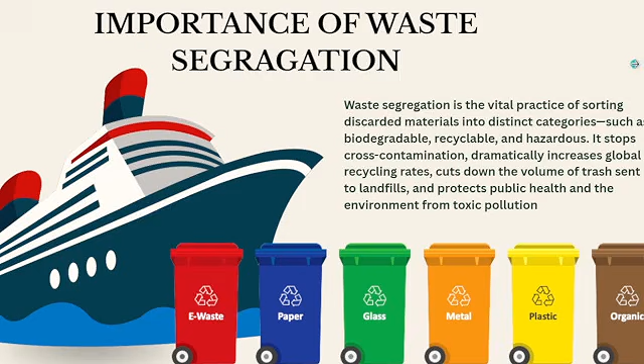Alright, for the topic of understanding shipboard garbage, let's identify the different types of garbage that we may encounter on board. In this slide, there are several common categories: e-waste, paper, glass, metal, plastic, and organic waste.

Let's briefly discuss each one. First is e-waste, or electronic waste. These are discarded electrical or electronic devices. Examples are smartphones, laptops, broken televisions, refrigerators, and microwaves. On board, we may also encounter electronic components like damaged sensors, circuit boards, wirings, or other electronic equipment.

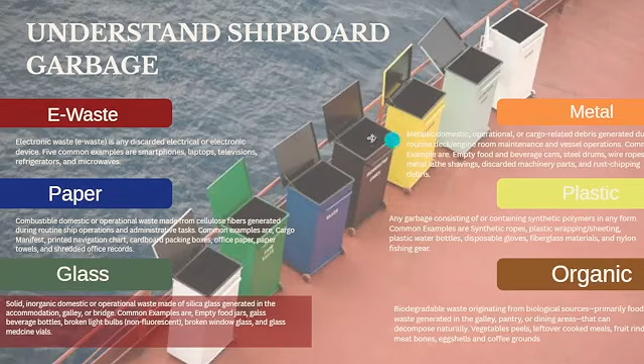Next is MARPOL Annex 5, the most important part for today's lesson. This deals specifically with how to prevent pollution by garbage from ships. Our main objective is to protect the marine environment by regulating how ships manage and dispose of garbage. That is our main objective for MARPOL Annex 5.

For all seafarers, MARPOL Annex 5 is not simply a regulation we study for an examination—it affects our daily work on board. Every time we separate garbage, store the waste, process the waste, record the garbage operations, or arrange disposal through a port reception facility, we are already participating in shipboard garbage management under MARPOL Annex 5.

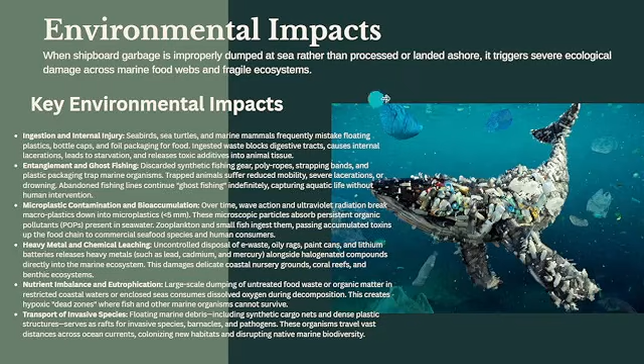So it all boils down to proper waste segregation or garbage segregation. Here, the shipboard waste management.

Now we move from the environmental impact to the practical side. What do you think, or how do we manage waste on board? Shipboard waste management involves several important systems and procedures.

First is garbage separation. Can you see here? There's a lot of trash bins. Food, plastic, metal, and other waste must be segregated or separated according to the applicable garbage management procedures.

Secondly, the incineration system. Some approved waste types may be burned using the ship incinerator. But we must remember that not everything can be put into the incinerator. There are materials that cannot be burned because they can create serious hazards if improperly incinerated.

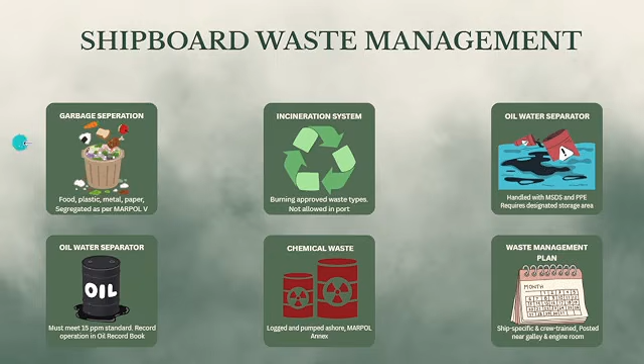Now, since we have covered the basic foundation, we have discussed what waste segregation is, the major types of shipboard garbage, MARPOL Annex 5, the special areas, the environmental consequences of improper disposal, and the basic systems.

Used for shipboard waste management. From the next part of our presentation, we will go deeper into specific types of garbage that are produced by different departments on board, including the galley, the engine room, the deck, and the cargo operations.

Now, as we continue, I want you all to think about your own experience on board. Ask yourself, what kind of garbage does your department, for example if you're from the galley, produce every day? From your cabins, from the engine room, and more importantly, am I putting each type of garbage in the correct place?

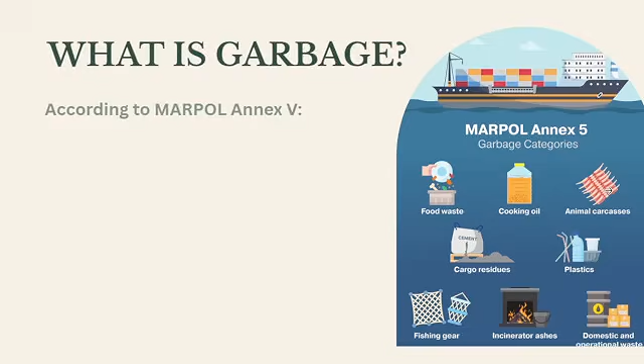So basically, when we say garbage according to MARPOL Annex 5, it includes all this - generated during normal operation of a ship. I want to emphasize, normal operation of a ship garbage. Every day we cook, we maintain equipment, crew members live and work on board. So garbage is not something we do only when we arrive at port. It is an everyday shipboard responsibility.

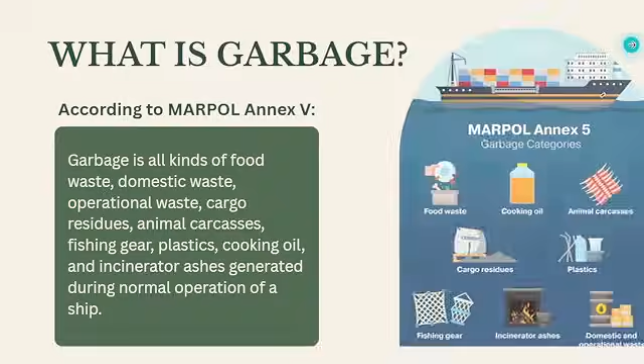And for Annex 5, as discussed earlier, these are the special areas. So after discussing the special areas, let's go to garbage categories - we have plastics, food waste, domestic waste, and operational waste.

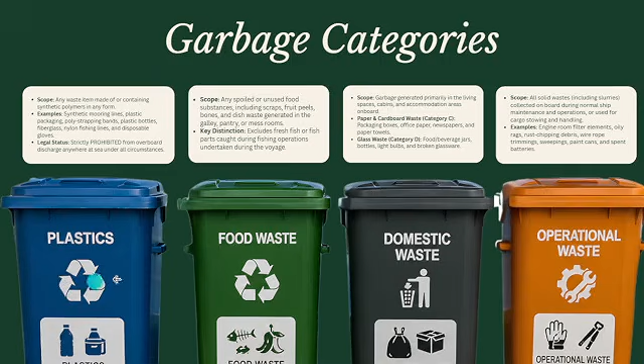I want you all to remember, it's so basic - proper garbage classification is not only simply about putting waste into different colored bins. We need to understand what garbage actually is, where it came from, and what requirements apply to it. So if it's plastics, food waste, domestic waste, or operational waste, we have to understand where it came from. When we classify garbage, we have to look carefully at the material and its source.

Here we have animal carcasses, incinerator ashes, cooking oil, or cargo residues. We have to learn to classify that.

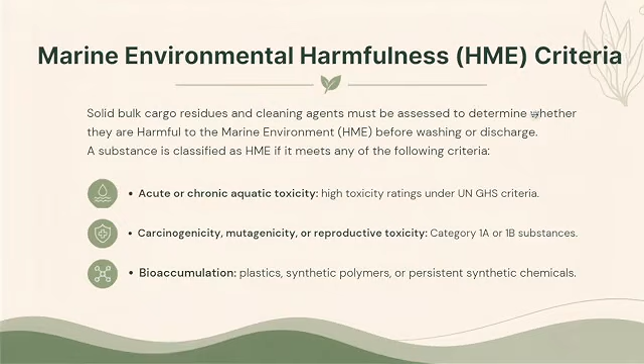Now, for the marine environmental harmfulness criteria, this is particularly important when dealing with solid, bulk cargo residues and cleaning agents. And then, the meaning of garbage, classification, with detailed shipboard routines and safety benefits.

So basically, the plastic remains plastic. We have to dispose of it properly along with all other waste. Always remember this: correct classification at the source is the foundation of effective garbage management.

A detailed shipboard routine for waste classification. Since we've already discussed the practical part of garbage classification, waste classification follows a clear 4-stage physical process from generation to its final disposal. We have primary sorting at source, pre-treatment processing, and the plastics and food wastes stage.

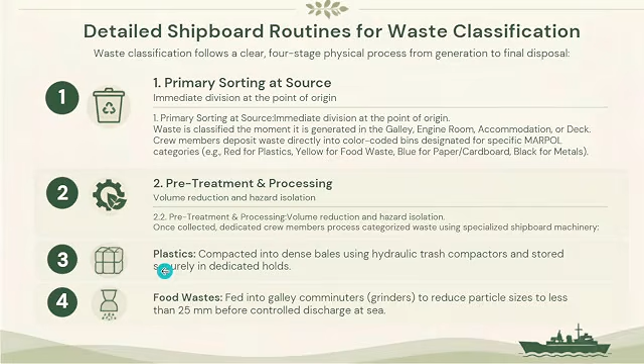Remember this always: processing does not change the identity of waste. If plastics enter the food waste stream, grinding it does not make it food waste. That is why proper segregation must happen at the very beginning, from the very start.

Now, for the operational and safety benefits of garbage classification, I'll ask everyone: why is garbage classification a safety issue? Many people may think garbage segregation is mainly about environment protection. Well, of course it is. But it's also directly connected to shipboard safety.

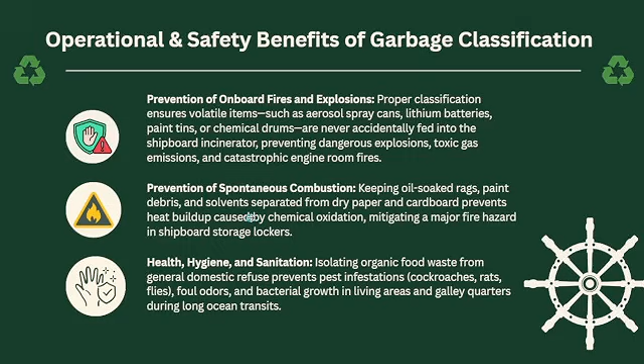The first benefit is prevention of fire and explosion. Secondly is prevention of spontaneous combustion. Thirdly is hygiene, health, and sanitation. All of this can create unpleasant odors and bacterial growth. So when we segregate garbage correctly, we are protecting the environment, our ship, our equipment, and of course ourselves.

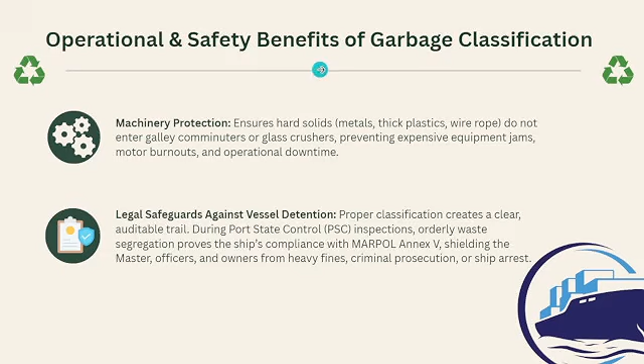Now, with the operational and safety benefits of garbage classification, basically garbage classification is not just about putting waste into the correct bin. It helps protect the vessel from equipment damage, safety incidents, regulatory problems, and unnecessary expenses. Those are the operational and safety benefits of garbage classification.

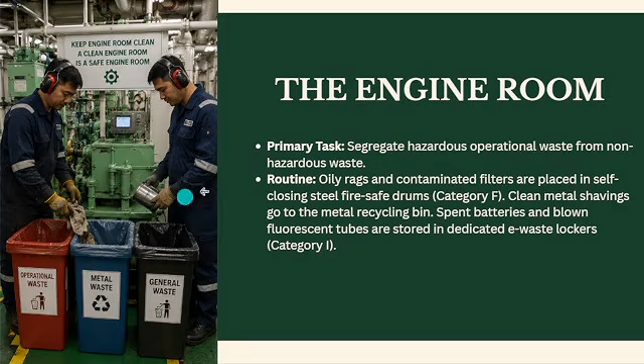And of course, for the engine room, follow this one. You follow the proper segregation also. Again, if there is uncertainty or if you're not sure, the safest approach is to check the garbage management plan, or ask your responsible officer.

Not only is it the responsibility of the chief officer, the chief engineer, or other designated garbage officers, but everyone who generates garbage has a responsibility to classify it correctly. So each of us on board has a responsibility.

Next is the operational and shipboard safety impacts. Here, garbage segregation gives us four important benefits.

The safety, the equipment protection, onboard hygiene and health, and efficient storage. So basically, for the operational and shipboard safety impacts, proper garbage classification also directly improves shipboard safety, working conditions, and equipment longevity.

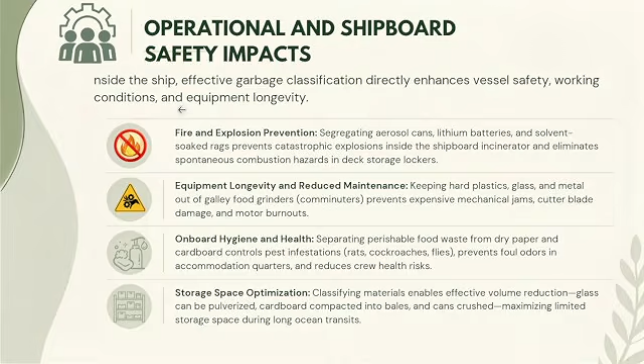So, comparing improper to proper garbage classification, this slide is useful because it shows us the consequences in different operational areas. We can look at legal compliance, the effect on the marine environment, shipboard safety, and hygiene and living conditions. It all boils down to proper classification.

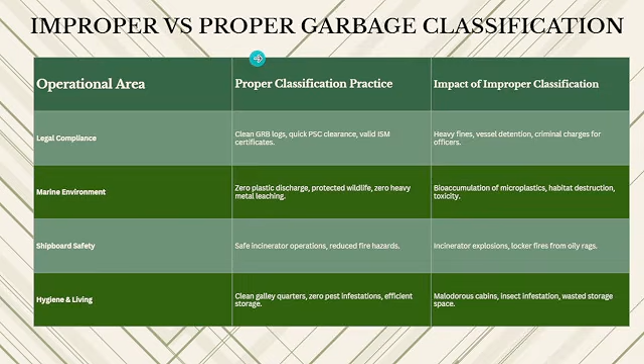Of course, it protects everything. It protects the environment. It protects the vessel. It protects the crew. And it protects the company, of course.

Here are the example scenarios. There's an incinerator explosion error. Look at the label, paper and cardboard, and then you throw away an aerosol. This aerosol is burned, and there's a big possibility of an explosion of the incinerator. So proper disposal is important.